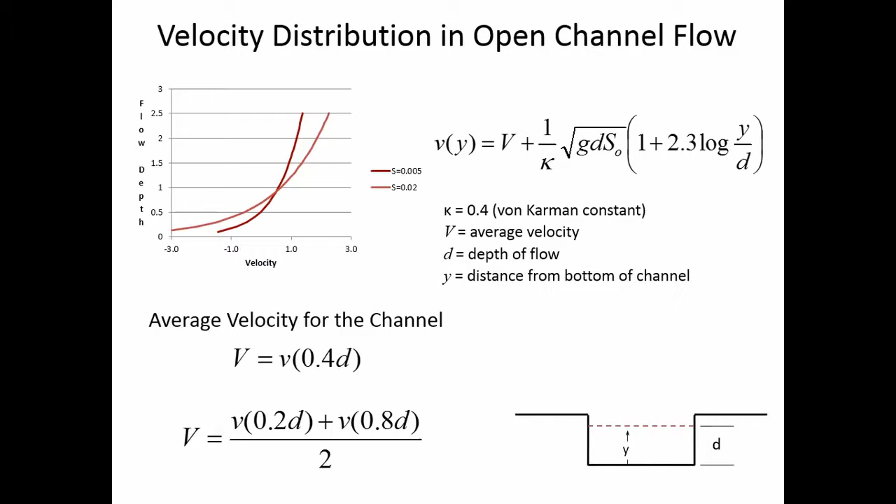Usually the way they measure velocity at a single point is with something that looks like a boat propeller, a little impeller that's put into the water. It spins, and a reading comes up on how quickly it's spinning, which corresponds to the flow velocity. They take velocity readings at a couple of depths, and that's how they come up with the average velocity for flow in the channel, using physical measurements and then taking an average.

Another thing that doesn't quite fit exactly with the textbook but is important to understand is what to do when you've got a floodplain and have to come up with a composite or average n value. Let's say flow ordinarily is in a trapezoidal channel, and the material in the main channel might be compacted clay, concrete, or plain soil. So you'd have one set of n values for the trapezoidal channel, but different materials in the floodplain, which can include grass, weeds, stumps, and all sorts of trash.

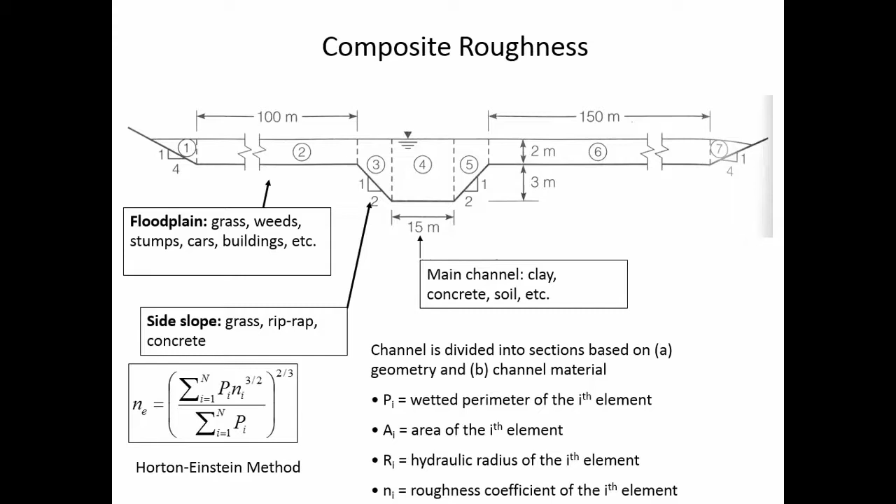One common approach for coming up with an average n value is the Horton-Einstein method. In this method, you weight the n value based on the wetted perimeter. For each element, you multiply the wetted perimeter by the n value of that element, then add up all the pieces. So for the second part with all the trash, weeds, and debris, you'd come up with a weighted average based on the wetted perimeter. There are other approaches that base the n value on area, but the advantage of weighting by wetted perimeter is that resistance is applied at the surface, and it's that contact length that determines how much resistance is applied.

This is Manning's equation. If we have a certain n value we can't change, forced to use a certain material, and a given slope S naught, how do you maximize the flow rate based on this equation? You want a big Q, so if N and the slope are fixed, you want a big area and a small wetted perimeter. So the most efficient channel is one that minimizes wetted perimeter.

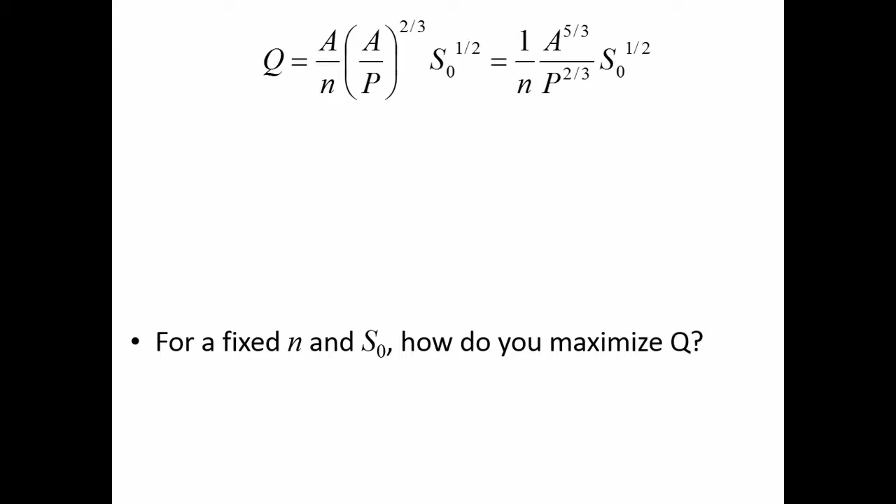Let's take these different shapes into consideration. What do all of these shapes have in common? They're all rectangles, and the cross-sectional area for all of them is 20 square meters. Would you expect that all of them have the same flow capacity? If you put that into Manning's equation, would you get as much flow through this shape as through this one? Even without knowing Manning's equation, why would you instinctively expect the channel on the far left to not have as great a capacity as the one on the far right? What is it about that channel that makes you think you won't get as much flow through it?

Why is there going to be more resistance? You're right, but why? There's a long wetted perimeter and it's narrow, so the flow just can't get away from the resistance. If you're thinking about it that way, where is it the flow has the freedom to move without being under the influence of that no-slip surface?

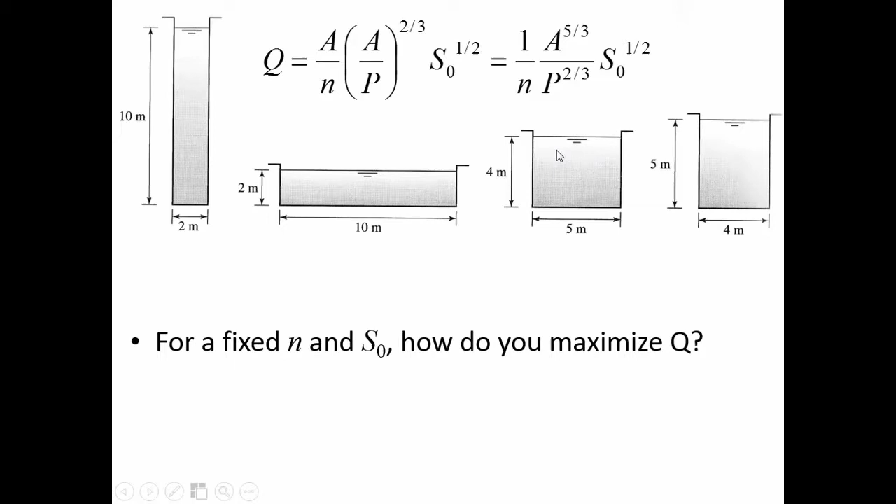Remember, the no-slip condition is that water doesn't just move without any resistance over a stationary object. Actually, the water at the interface of the object has the same velocity as the object itself. So we've got a certain thickness into the water that has the laminar sublayer, and even on top of the laminar layer, there's still resistance. Whereas here, in the center, it's far away from resistance, and so it's going to have more capacity because more of the cross-sectional area is far from resistance.

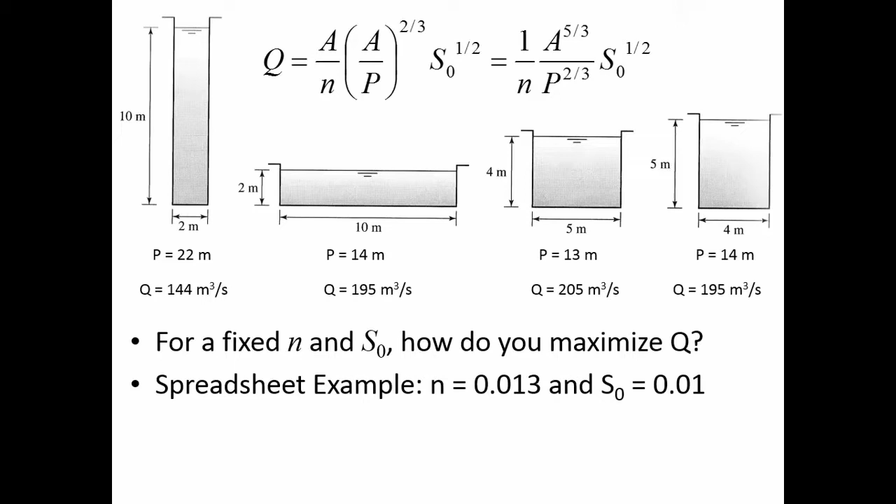So let's do a spreadsheet example. I'm going to show you an illustration that just makes this point—how we know that we can find some cross-section that's best.

So what I'm going to do is have the channel width B, Y is our depth, area, wetted perimeter, hydraulic radius, and then a flow rate in cubic meters per second. And for all of these, we're going to have the same slope of 0.01 and the same n value of 0.013. Let's go back here. Maybe I'll just copy this over so I've got these to look at.

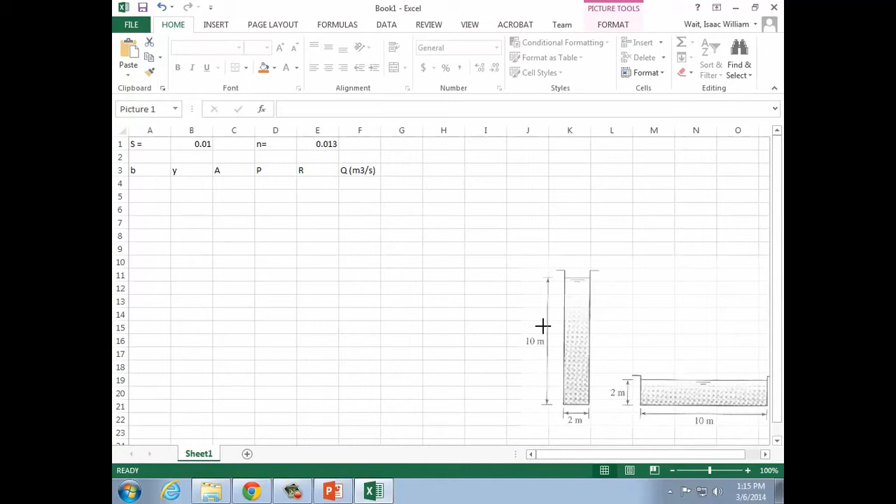So we're going to have one of them that is 10 by 2 — the bottom width is 2 meters and the depth of flow is 10 meters. We have one that's 10 by 2 the other way around. We've got a 5 by 4 and we've got a 4 by 5. Working from left to right, the bottom width was 5 and then 4.

Area is just going to be B times Y for each of these, so we're going to see that they all have the same cross-sectional area. This process is very similar to the last homework problem on your assignment, which gives you a weird-looking shape — some channel that is straight on one side and inclined on the other. You're going to try and minimize how much it costs to build this. The solution I did for that problem is actually a spreadsheet solution where I try lots of different combinations to see what cost is the lowest. So keep in mind this has a direct application to the last homework problem.

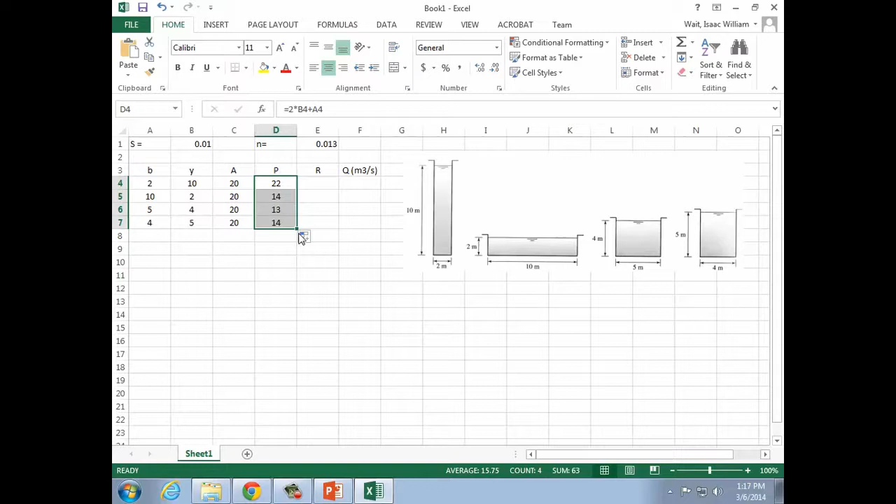The wetted perimeter for these is simple to calculate: it's going to be 2 times the depth plus the bottom width. So that's my wetted perimeter. In the homework problem, you'd have to calculate the wetted perimeter of that inclined surface a little bit differently — you'd find the height of it, the horizontal component, and find the length according to the Pythagorean theorem. Hydraulic radius is area divided by the wetted perimeter, so we can carry that through.

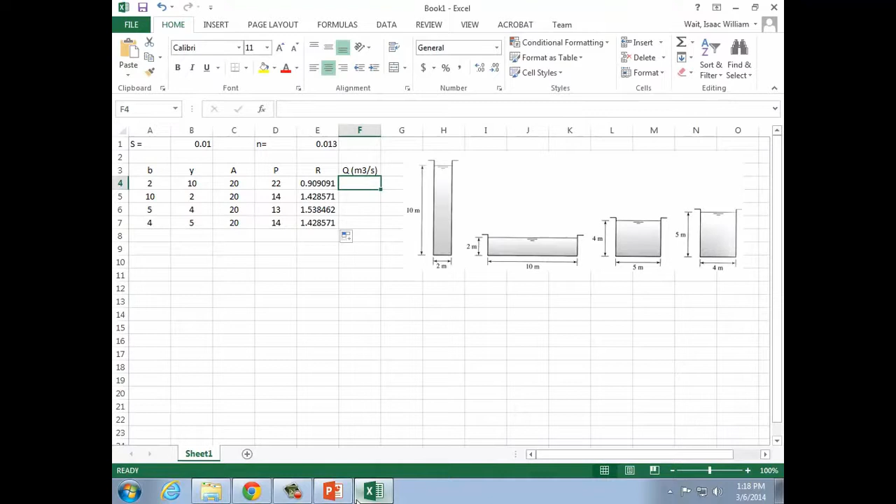And then finally, the flow rate is going to be Manning's equation, so I need to type Manning's equation in here. This is what I'm going to be entering for Manning's equation — I'll do it on the far right. So it equals the area to the power of 5/3, times the slope, anchoring that to the 1/2 power, divided by n, also anchoring that reference, and then divided by the wetted perimeter to the power of 2/3. Any questions on Manning's equation, how I've typed that in?

Now I find out what the capacity of that channel is if it was this 2 meters wide, 10 meters tall. I can just drag it down and find out that of the options listed, the most efficient is this one — it's the one that's 4 meters depth, 5 meters width. But that's just the most efficient of the options provided. I could probably do a little bit better.

So the way that you maximize flow is by what? In this example, the constraint has been that the cross-sectional area has to be 20. So I'm going to do another one where I'm forcing myself to have a cross-sectional area of 20. So how do I get the best flow rate?

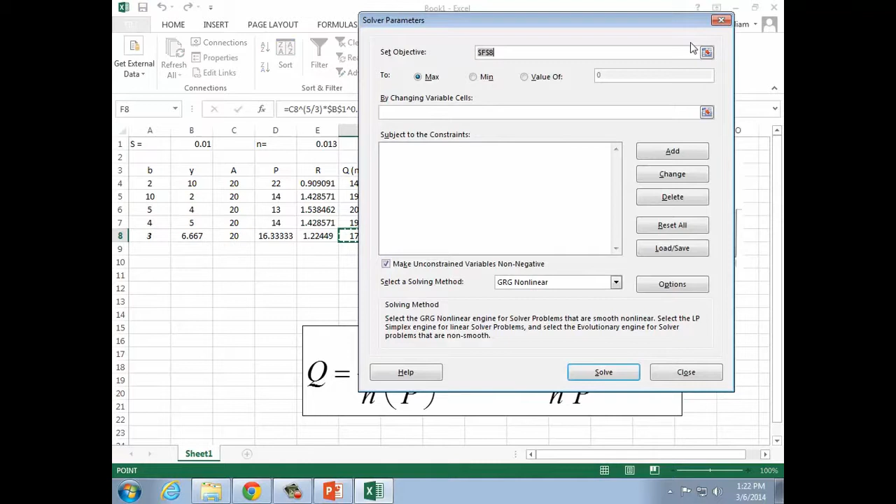So now I go to the Data tab, and instead of What-If Analysis, I go to Solver, which is an add-in you have to install separately into Excel. Click that, and now it gives me a few more options. Instead of having to know what value I'm going for, my objective is for this flow rate to be maximized. And I'm going to tell it to change B in order to make that come about. Now these other options let you say how close it has to be before the solution converges, but the default in this case is fine - we don't have to override the convergence criteria.

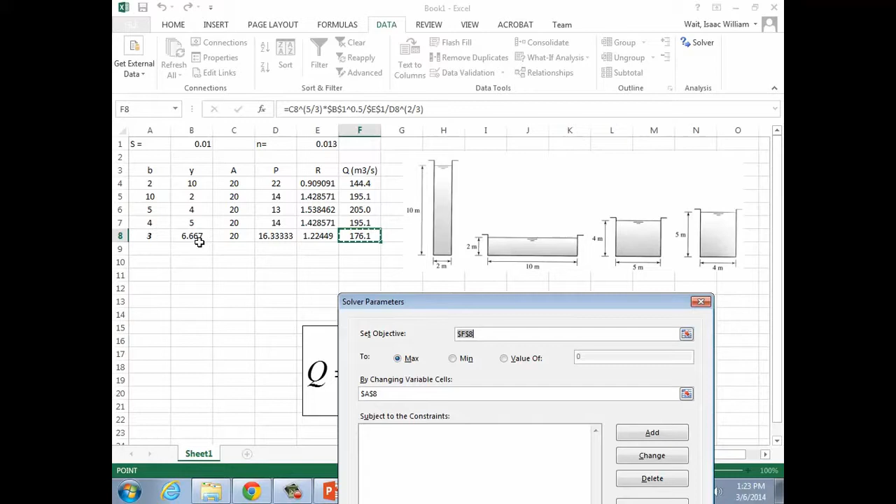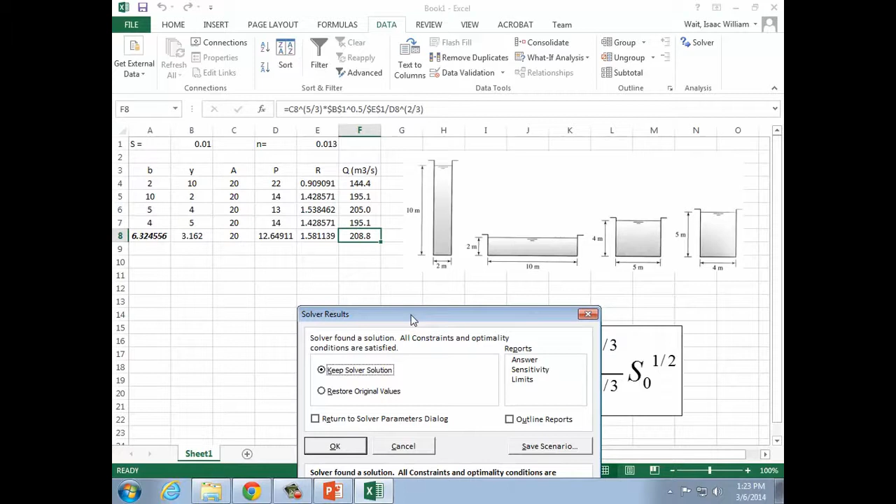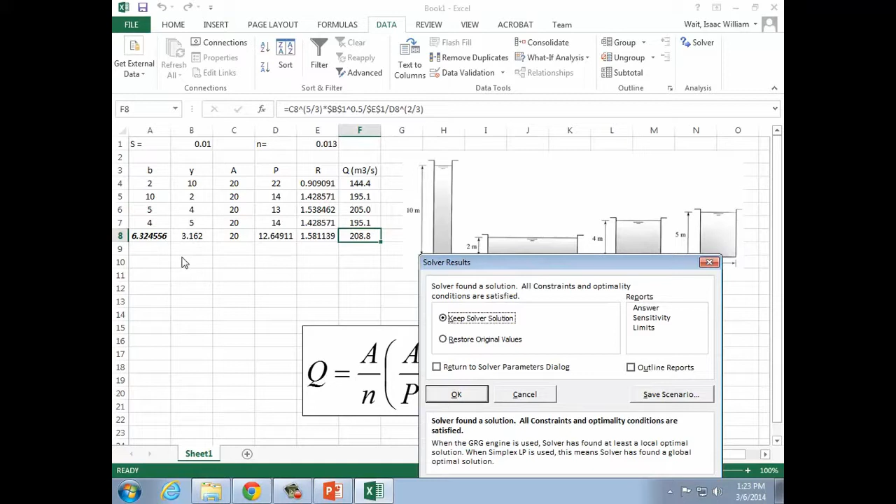So again, we want the objective to be maximized, and it will do that by changing the width. As it changes the width, it's also finding the depth indirectly. So solve, and let's see what it came up with - we could get 208.8 cubic meters per second. That's the maximum. And what do you notice about the B and the Y? It looks like it's half. I'm going to have it keep that solution. So what is B divided by 2? Well, there it is - it's our depth. So the most efficient rectangle is a half square.

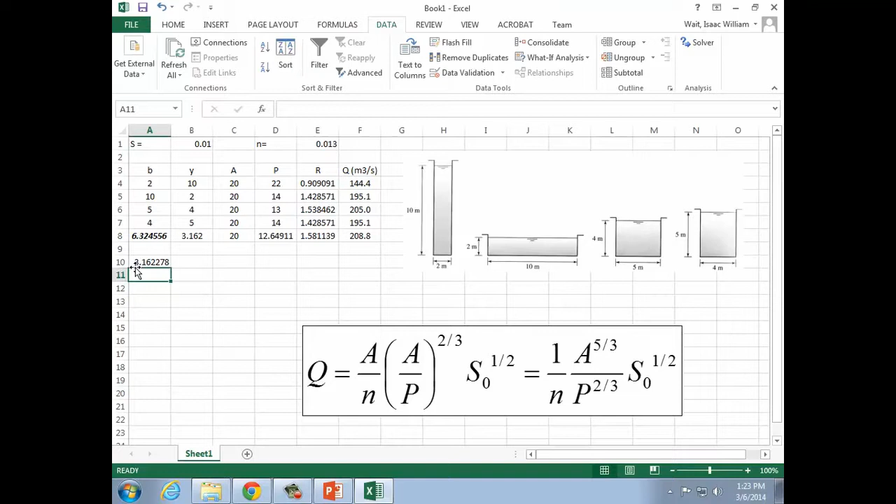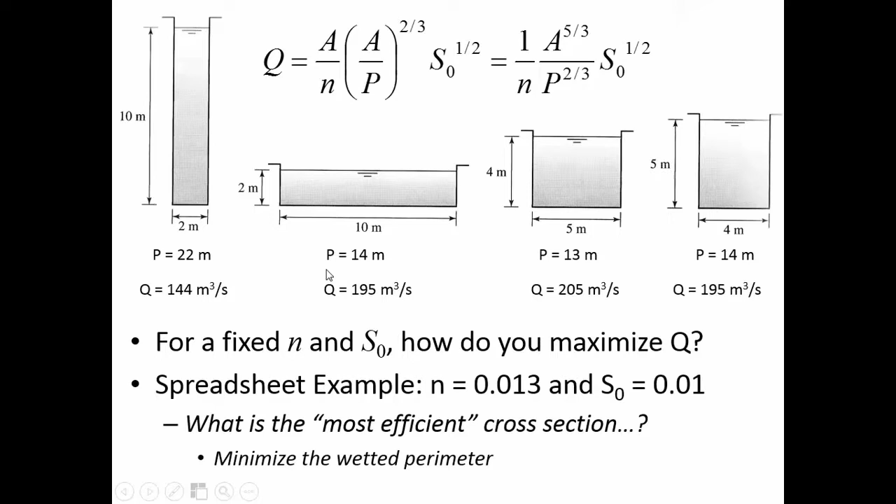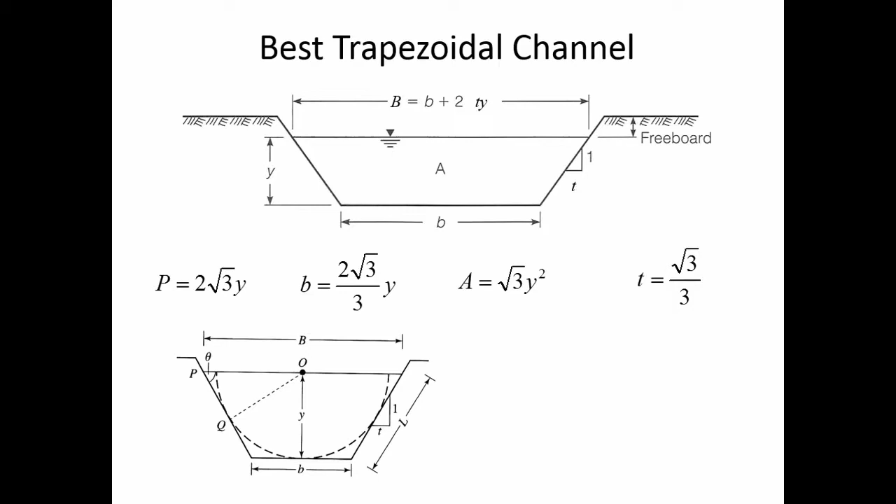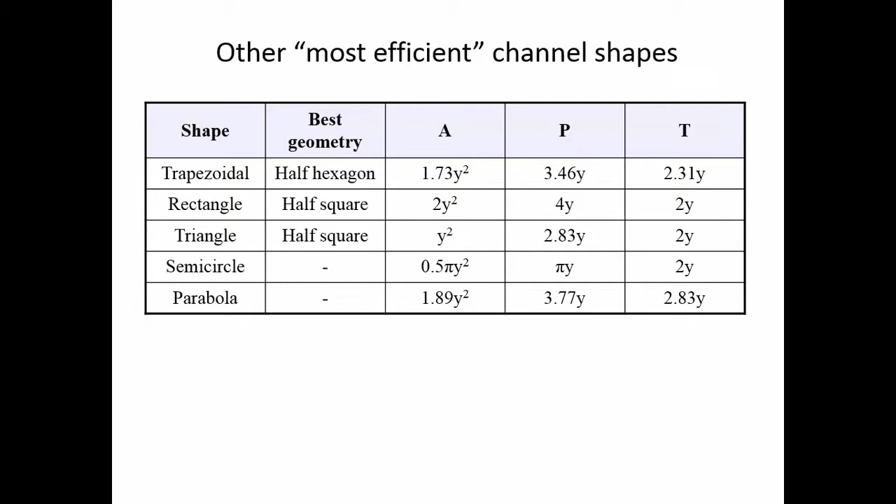So here are some other shapes that are most efficient. By most efficient, what we're going for is the shape that gets closest to the half circle in order to maximize the area that is away from the resistive surface. So here is the best triangle. It is a triangle that has a 90-degree angle down here because it's the one that allows us to put the most of the circle in there. Let's try this out.

This is a combination of best section and Manning's equation. Hopefully you've taken the time to figure out how to solve equations on your calculator because, like I've said before, there's no escaping that need.

What will be the flow depth? What is the y if we're going to do the best triangular cross-section, and we know the flow rate that has to be accommodated is 2.5 cubic meters per second. That's what we're trying to convey from point A to point B. We're going to use concrete that has an N value of 0.013, and it's a 1% slope. So what will be the flow depth?

To solve this, use Manning's equation, and here are the formulas you should use for area and wetted perimeter. Use the triangle: area is y squared, wetted perimeter is 2.83 times y. Feel free to collaborate with your classmates on this as you're working through it.

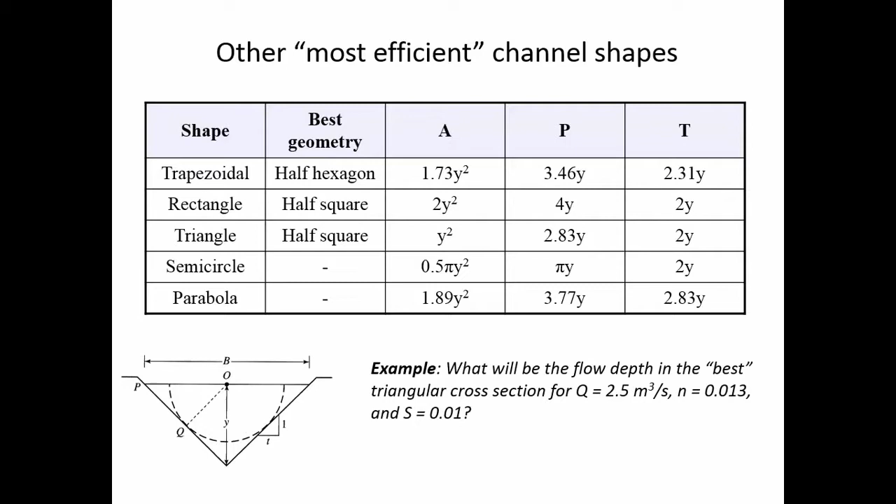In this, yes, T is top width, right.

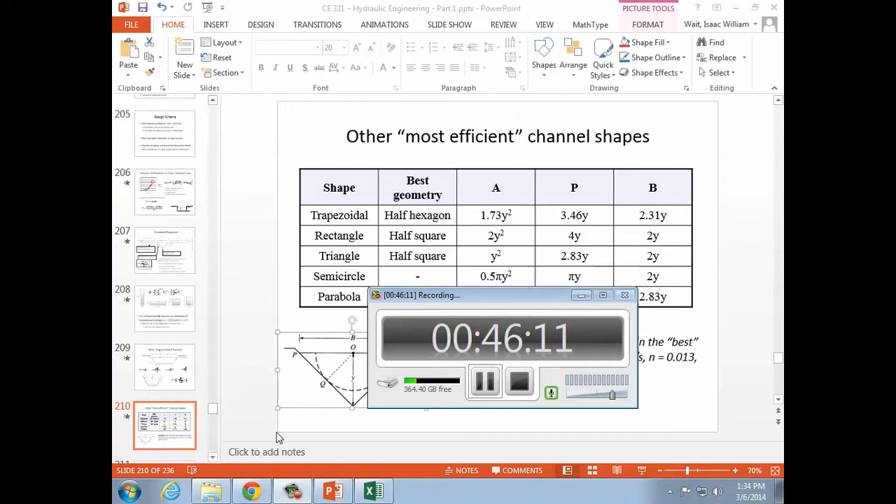All right, so let's take a look at where we're at with this one. We're solving Manning's equation, and we need to substitute in the formula for area and wetted perimeter in terms of the unknown depth. Manning's equation ordinarily would be area to the 5/3 divided by n times wetted perimeter to the 2/3 power, and then all of that times the square root of slope. For the triangle I've got here, with a 90-degree angle at the bottom, the area is the depth squared, and the wetted perimeter is 2.83 times y. So I just put those formulas directly into Manning's equation, and now I need to find the y value that gives me the right-hand side equal to 2.5 cubic meters per second.

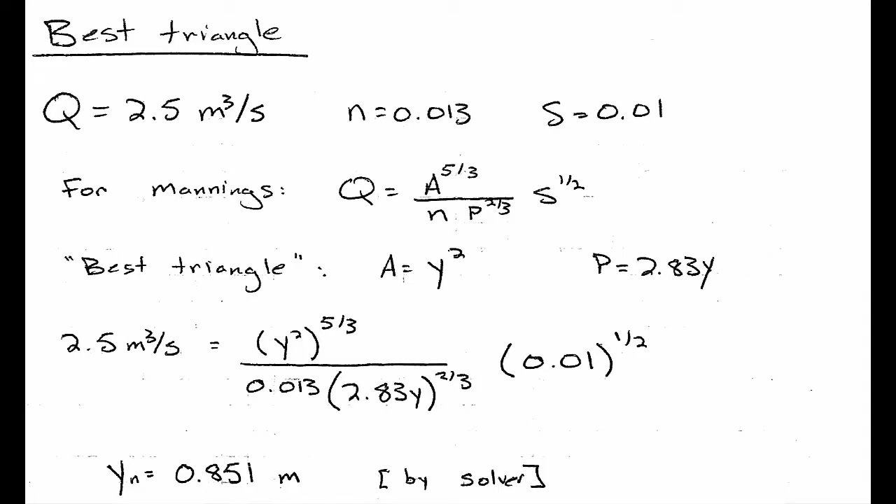Okay, now that we've got it set up, let's try solving that on the HP calculator here. I'm going to use the numerical solver, solve an equation, and enter it with the equation writer. I know the flow rate is 2.5, equal to y squared to the 5/3 power, divided by 0.013, which is my n value, times 2.83 times y to the power of 2/3, times the square root of 0.01. Alright, so we've got the formula typed in, and I'm going to solve for y, and it tells me 0.851. So that's the depth we're going to experience for the conditions described, solving Manning's equation.